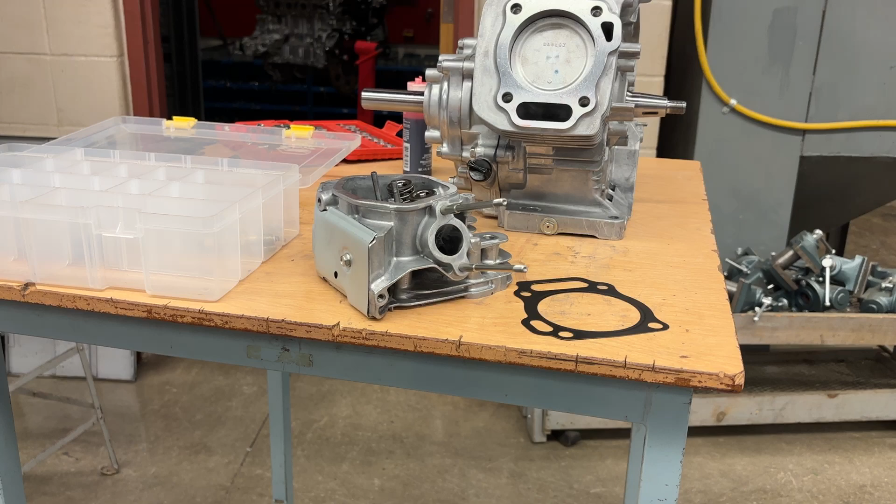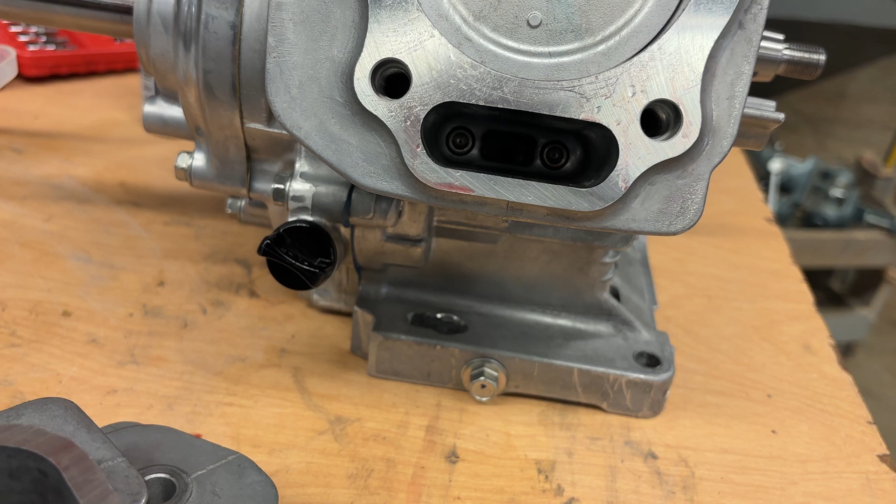We are into installing the head back on. I'm looking down inside and I can see that the tappets are in there. Should look like two little eyeballs down there. That's the end of those tappets that we installed on the inside of the crankcase. We need the head gasket and we need the head. We're also looking in our box,

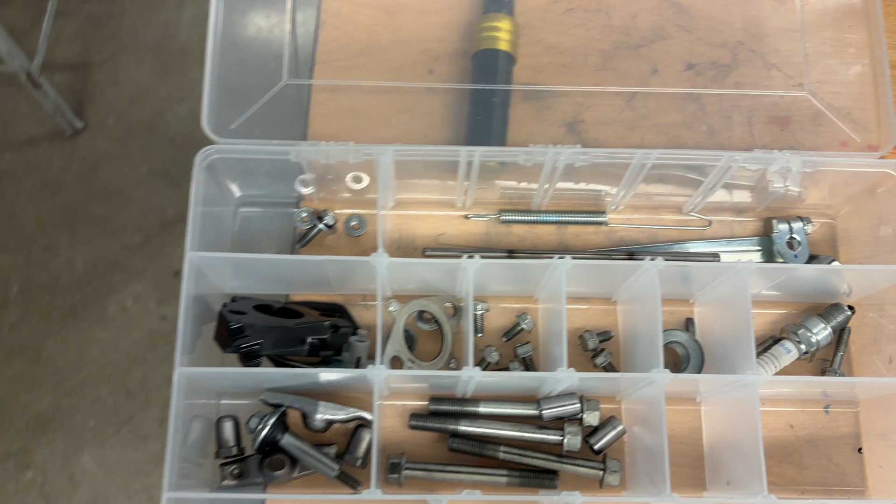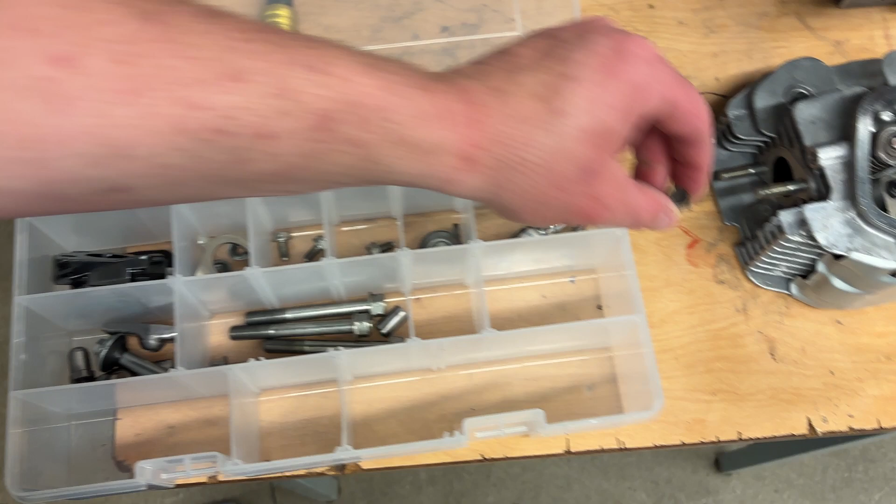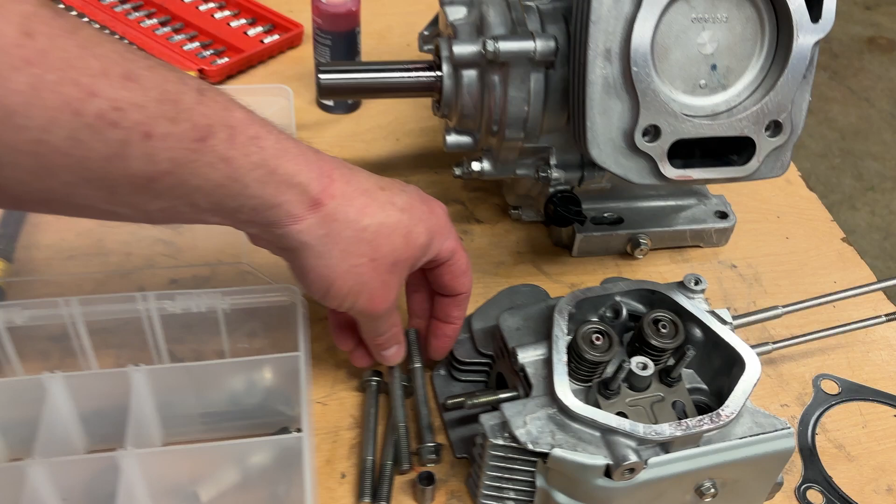and we've worked our way backwards so far, and we're to head bolts, the giant bolts, and two really nice little dowel pins. They're actually pretty big. So I got my dowel pins, and I got my head bolts. So if I take a look at the head, it is going to rotate up. My intake side is going to be to the flywheel side. My exhaust side is going to be out towards the crank or the PTO side. This is PTO, this is flywheel.

The head gasket is this nice thin piece of metal that goes right on there. Notice you can see holes through there and holes through there. Don't put this on upside down, sideways, the wrong way. This can go on a lot of different ways. Dowel pins, I put across from each other. Well, actually, on these, a lot of times you put them across from each other. This one here, you put them on the top. So I got my two dowel pins on. Those two dowel pins,

I'm going to take, and I just get that hole lined up with that hole, and I hang my head on those dowel pins. Some of you might be saying, wait, you didn't put any assembly lube on. There's nothing that's moving between those right now. Now I got my head bolts here. Those are a 14 millimeter head bolt. 14, that's a big bolt. Again, I always start with the screwdriver. And I got the top two, I got the dowel pin in. So I kind of like starting the bottom ones first.

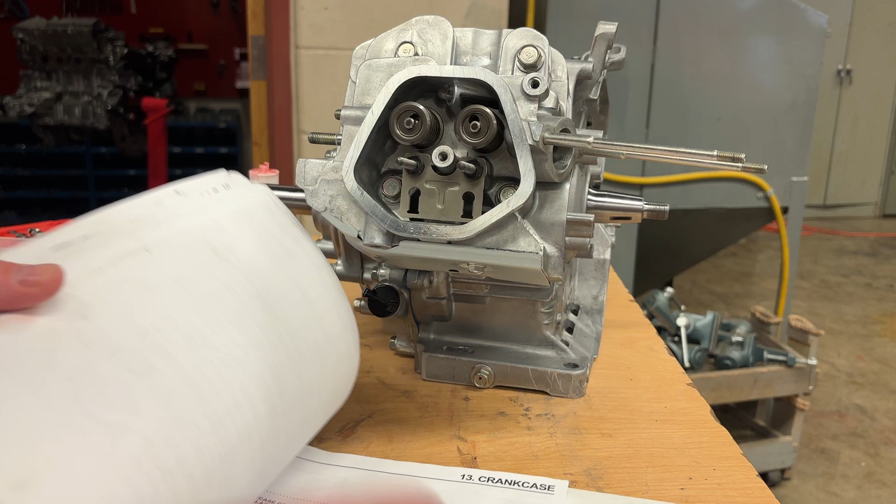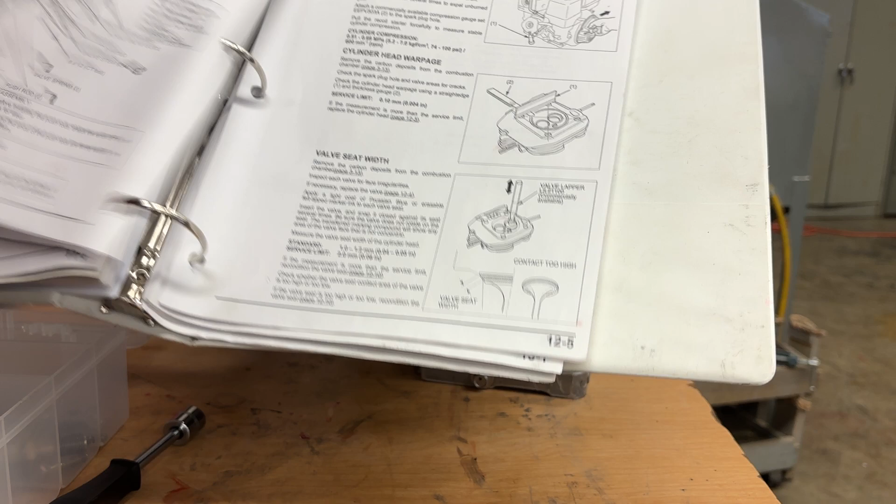And now I have to look in my manual. So I'm pulling up the manual. There is a specific tightening sequence to these. Cylinder head valves is chapter 12. So I start in chapter 12. It's telling me my torque down here. Torque is 26 foot-pounds, so that's 26 times 12. So we had the dowel pins, we had the head gasket on there. And let's look at the specific torque sequence. This happens on cars. This happens on everything. And cars are even more important when you have multiple cylinders going together.

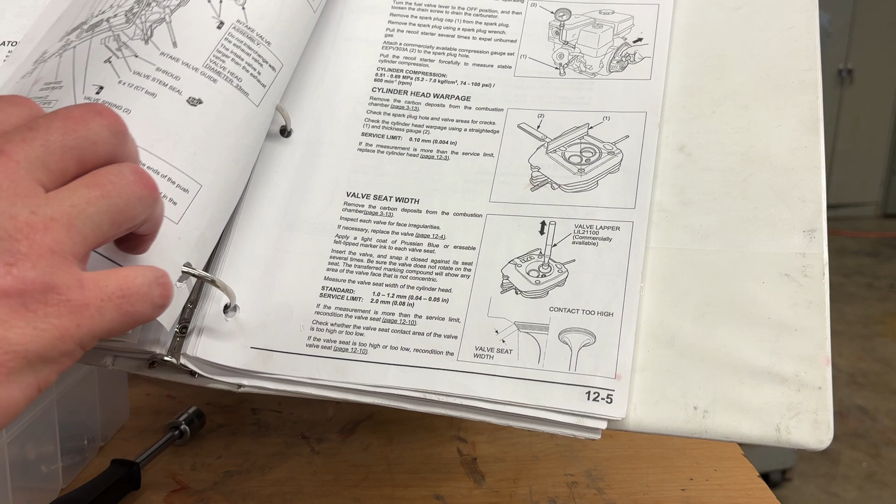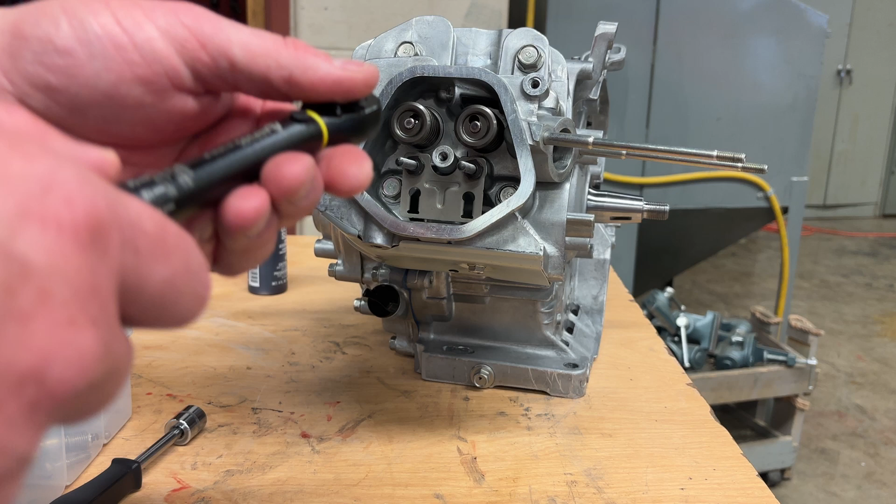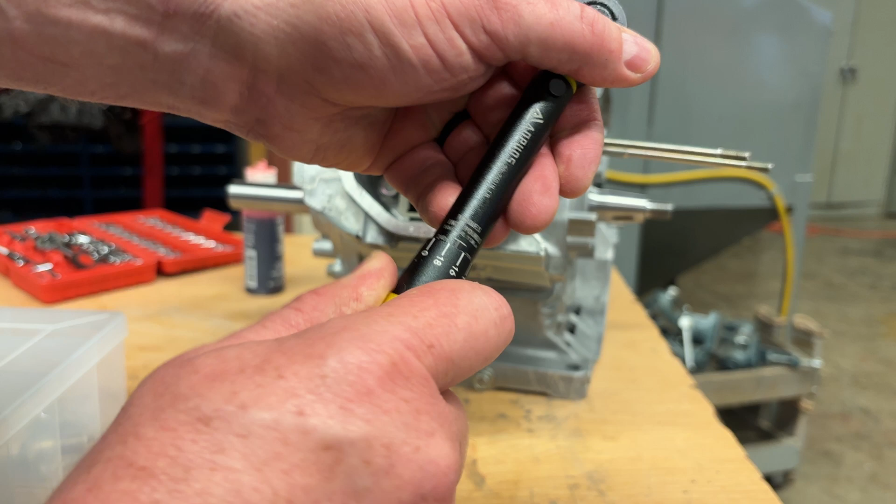Cylinder head disassembly. Here we go. It says loosen and tighten the 10 by 80 millimeter flange bolts in a crisscross pattern in 2 to 3 steps. So I'm going to set it for 26 foot-pounds, and I have to go in 2 to 3 steps. I don't want to do it all in one step. So 26 times 12. 26 times 10 is 260, plus 2 more 26s, so that's another 50. So I'm almost at 300 inch-pounds. So I'm going to set this up to 240. We're set right at the top.

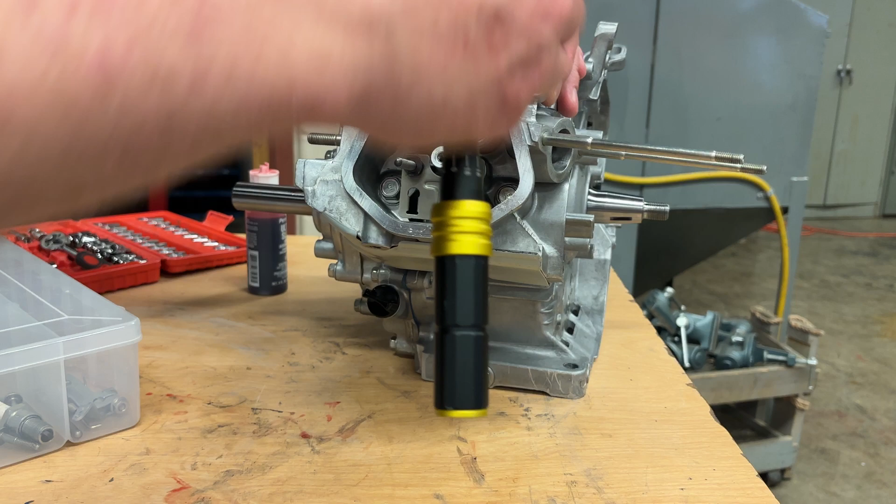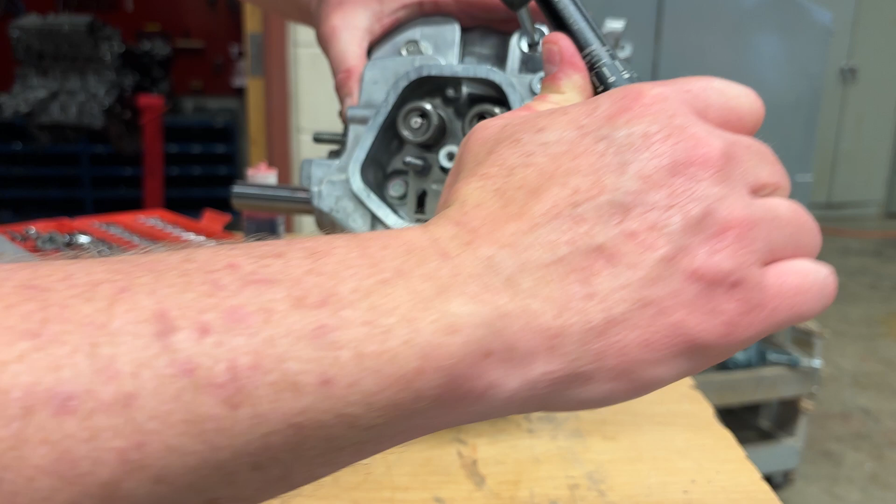And I'm going to do it in 3 steps. Remember what they said? Do a crisscross pattern. So I'm tightening, tightening, crisscross, tighten. Just hit my first one at 240. There's a 240. There's a 240. There's a 240. Just make sure. And I will say, generally when you're doing this, you don't want to have the extension in. But we're going to have the extension in for right now. Got them all up to 240.

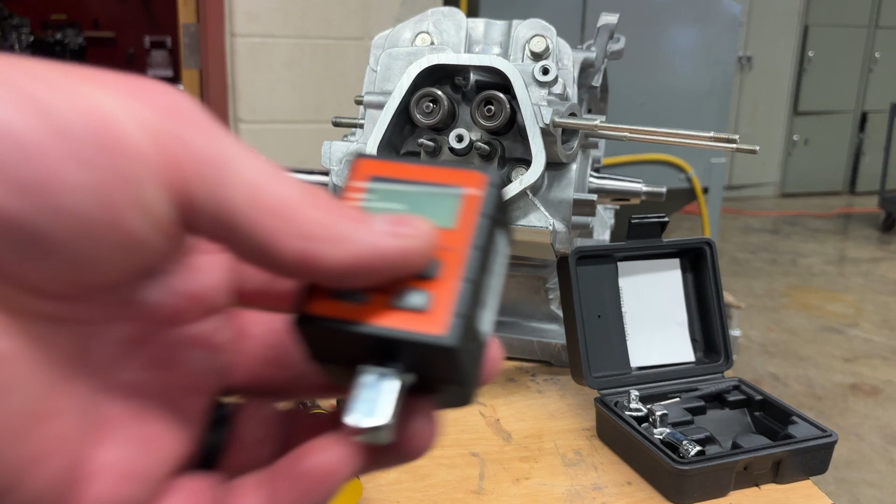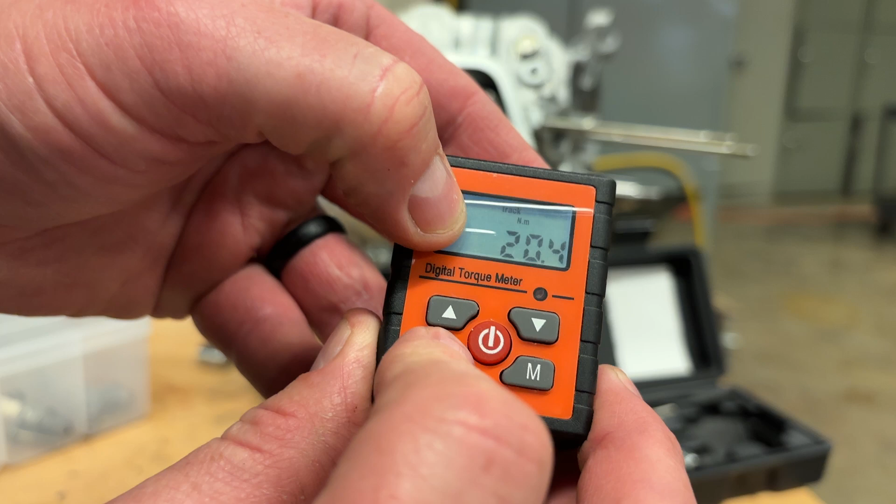We still got to go higher, so we're going to go over to the cabinet here. In the impact sockets, there are some more torque wrenches that can get you up higher. But we're going to grab the digital torque gauge. So I'll show you what the digital torque gauge does. Digital torque gauge, I turn it on. I'm looking here. I'm at 204 inch-pounds. I want to go Newton meters. There's foot-pounds. And it says 26 foot-pounds.

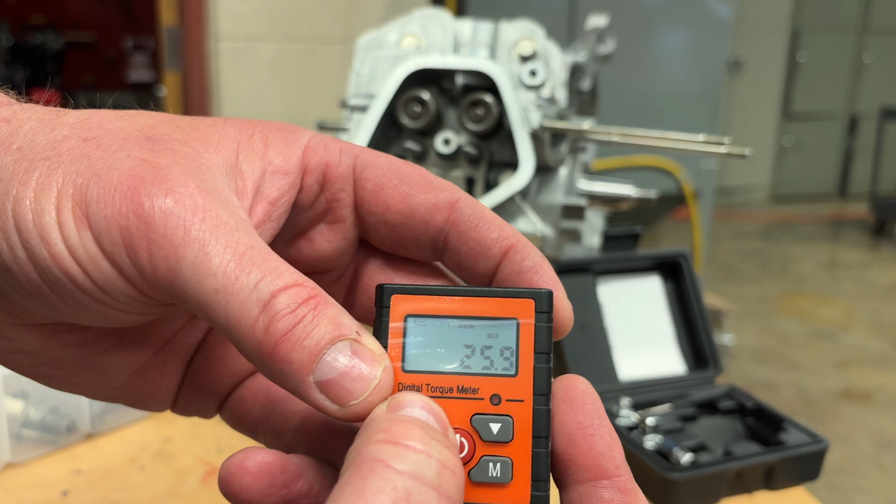26 foot-pounds. Gonna grab a socket. I grabbed the wrong one. Yep, grabbed the wrong one. I gotta grab a 14. So I grabbed the socket, breaker bar,

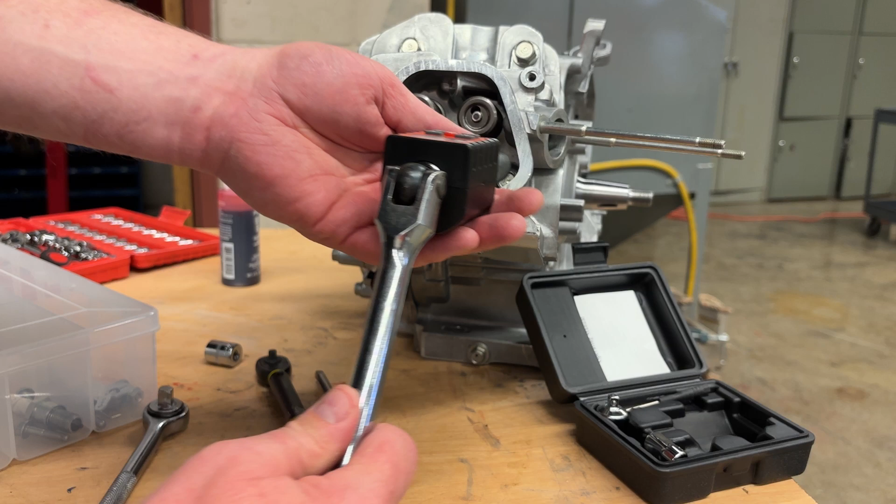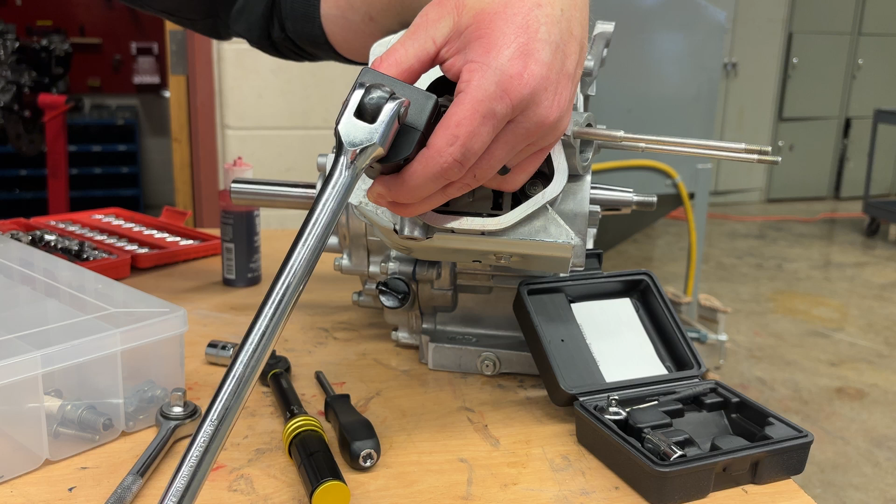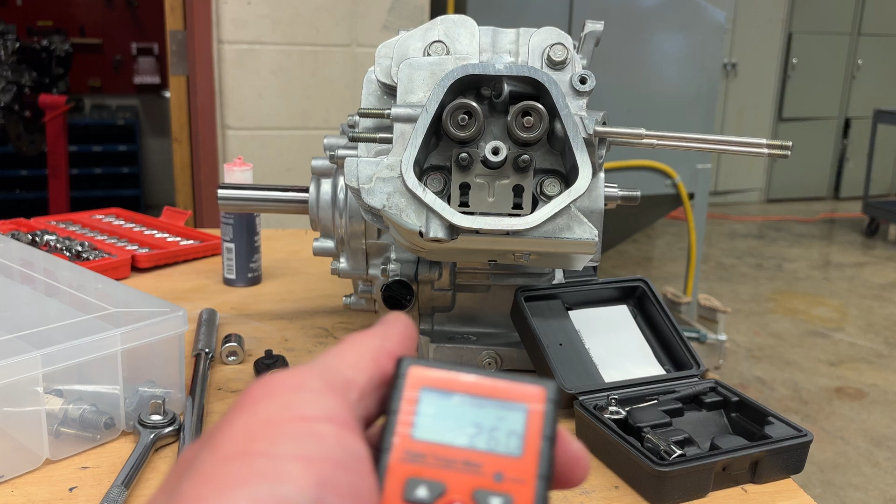There was 26. I can read it as it's going, but it also gives you an indication. 26. So we have it set to 26 foot-pounds. We could hear it beeping when it got up to 26. Now the head is on.